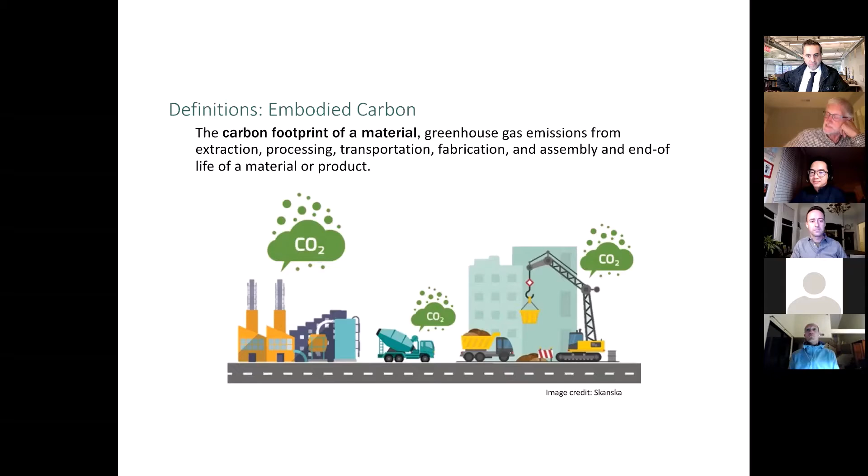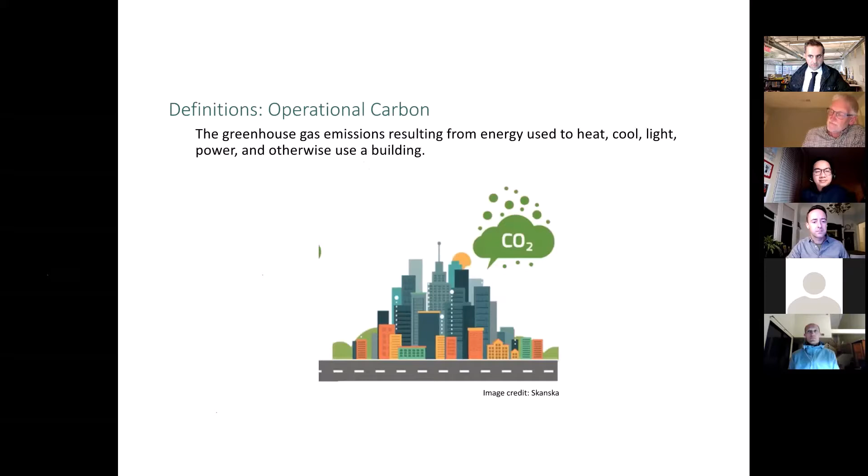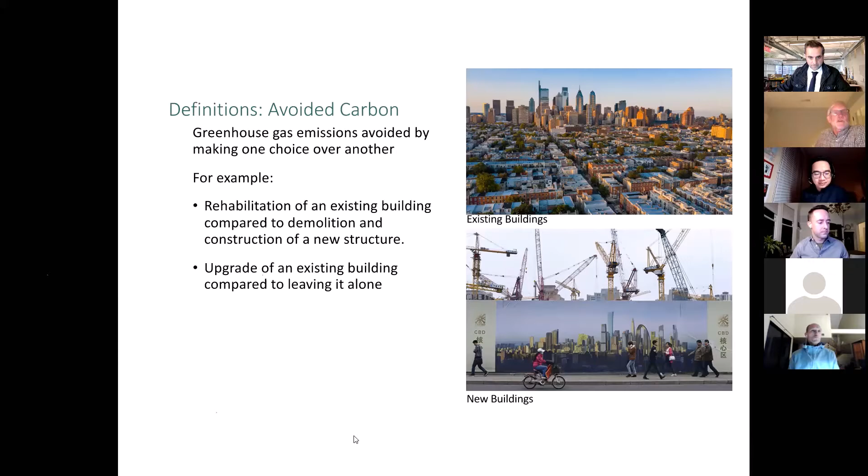Avoided carbon are greenhouse gas emissions avoided by making one choice over another. An example is rehabilitating an existing building compared to demolishing it and building a new structure, or upgrading an existing building compared to leaving it alone. So those are different versions of how one choice over another results in lower carbon, avoided carbon.

So I'm going to show you a renovation project. This is by SERA Architects, and it includes an embodied carbon analysis. It actually included a total carbon analysis, both embodied and operational carbon, which is why it's such an important study. These slides are from a presentation that SERA gave to the AIA Historic Resources Committee, and they were kind enough to share their presentation with me.

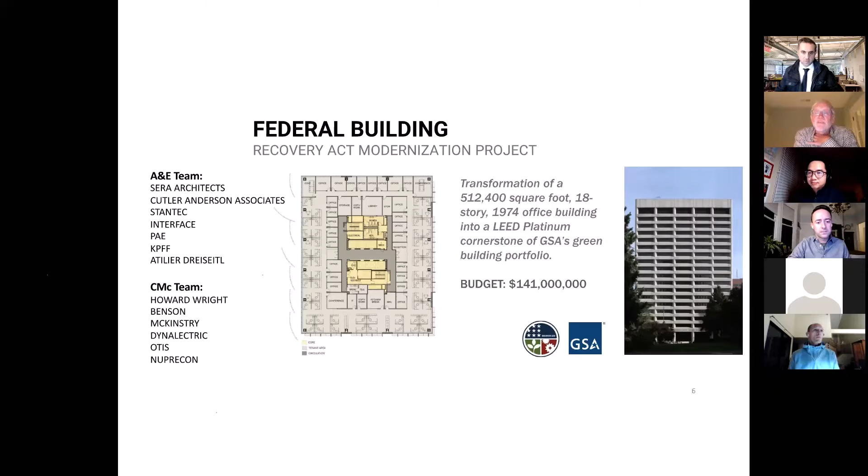It's a large federal office building, about 500,000 square feet in Portland, Oregon. Had a large integrated design team as well. SERA were the architects of record, and they worked with Cutler Anderson Associates, the design architect, and had an excellent engineering team and a construction management team as well. They had about a $141 million budget to renovate this large office building.

It needed a lot of work. They needed to upgrade all building systems. They needed a seismic upgrade on the existing buildings, which is typically a big embodied carbon hit. They needed to update the work environment and get better lighting, improve indoor air quality, and they needed to improve accessibility throughout the building. So they had a lot of things to do to this building.

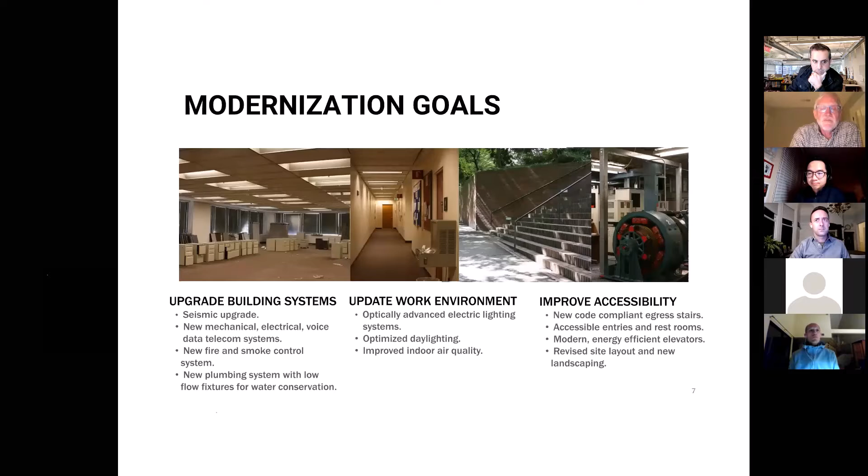The existing building on the left there was constructed in 1974. The demolition included removing all those precast concrete panels from the outside of the building, and then constructing a new skin or a shade structure. You'll see how this works on different sides of the building. And they got a lot out of doing that. I'll show you in a second what they got from that.

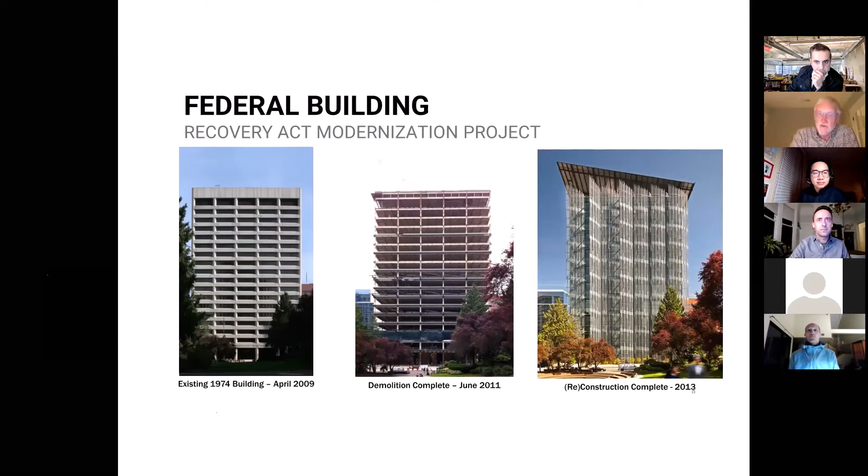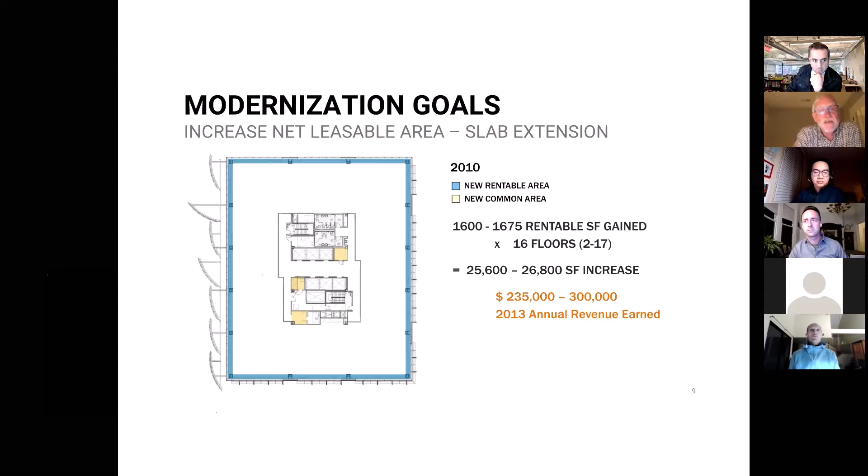So they were also able, by getting rid of those precast panels and building the new skin outside that, to actually increase the rentable, leasable area of the building. They got an extra 26,800 square feet of building on all the floors. And that was about $235,000 to $300,000 of annual revenue earned, because it's on a square foot basis. So they got some benefit by removing that skin.

The other thing that was really interesting is that by removing all those precast concrete panels, they lightened the building enough so that they didn't need the structural upgrade. So they avoided a huge piece of embodied carbon that they would have needed to strengthen this cast concrete structure. By removing all that extra weight, based on current seismic codes, they lightened the building enough where they did very minimal seismic upgrades. And they built this new skin, which served multiple purposes, but it was also much lighter than those precast panels.

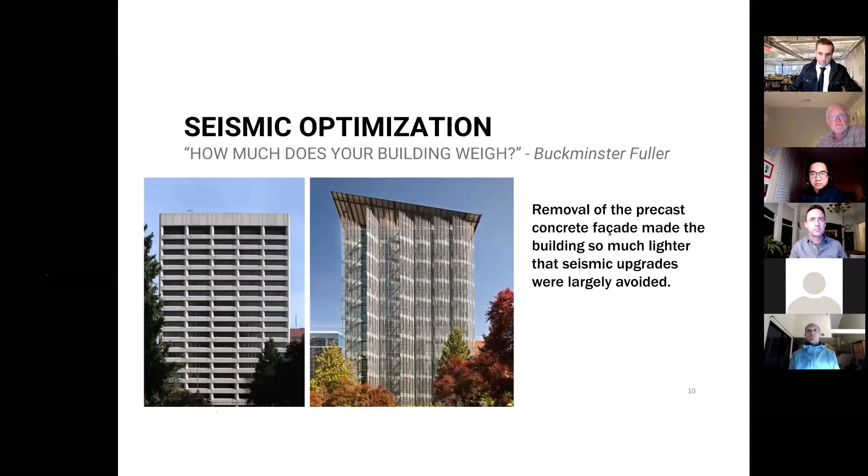The facade was optimized for each orientation and for what they needed it to do. On the west side, where the big heat gain comes from, they had undulating aluminum reeds that covered the facade and reduced heat gain by about 50%. The north side, they did no shading - just a simple wall with glazing. The east and south sides, they did horizontal and vertical shades, but much simpler than the west side. They did this both to figure out what they needed on each side and to keep the cost down. If they'd done that undulating facade across all four sides, it would have cost a lot more. So they were very smart about the way they upgraded the building.

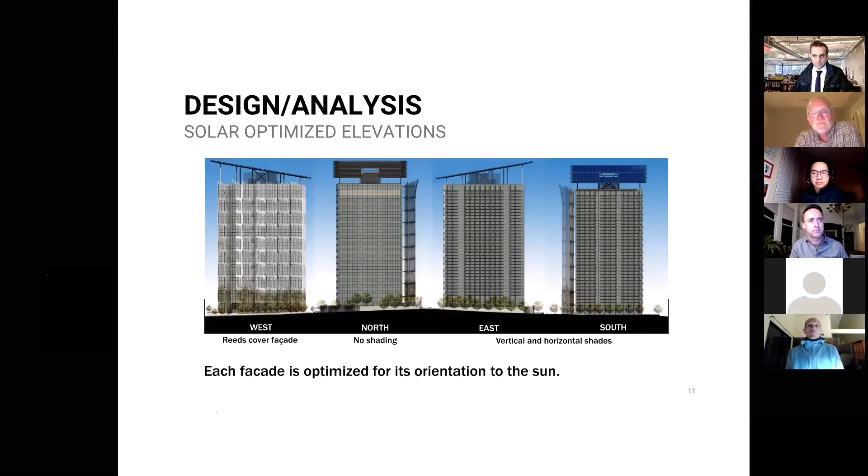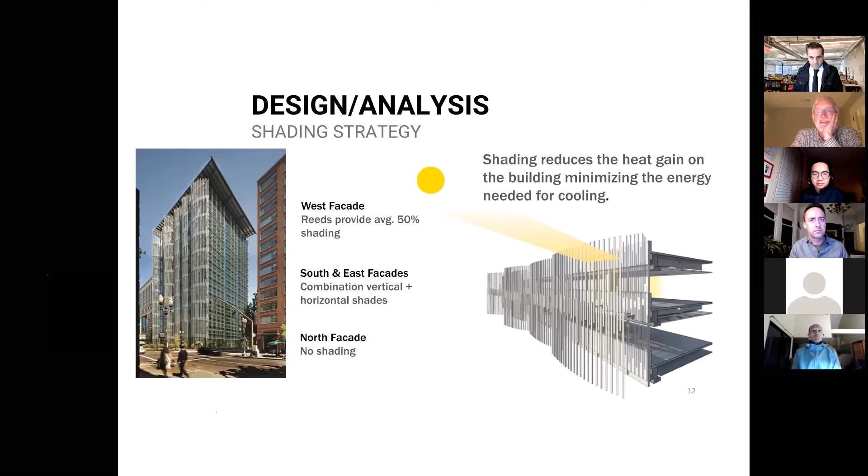So they did this shading strategy. As I said, they reduced about 50% of the shading on that west facade. The south and east facades were simpler, you can see them on that picture on the left. And they reduced the heat gain in the building, which minimized the energy needed for cooling. They got extra benefit from that.

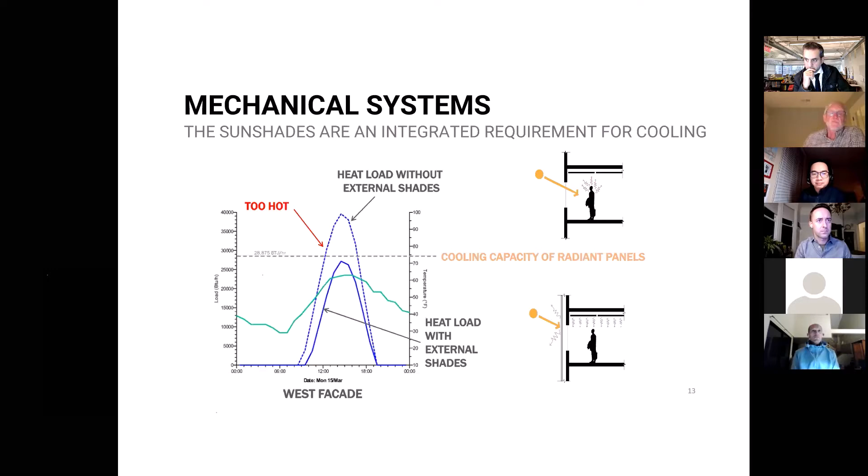What it allowed them to do was reduce the heat load enough so they could go to radiant cooling panels on the ceilings. You can see that without the external shades, the heat is so hot it wouldn't have worked - the cooling capacity of the radiant panels would have been exceeded. When they reduced the heat load with the external shades to that solid blue line, they were able to use this much more efficient system and save energy on that as well.

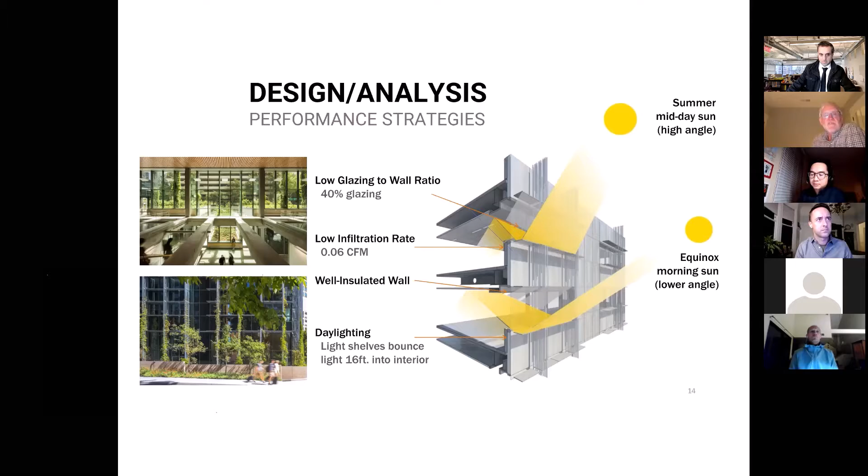What they got from this: the existing building had an EUI between 77 and 83. I don't know why there's a range there, but I guess that's the way they measured it. The average for that kind of building is 94 EUI, and their target was 34 to 36 EUI - they were going to basically cut their EUI in half. You can see this compared to some other high performance buildings built in the last 10, 15 years, and it's right in there with all of those.

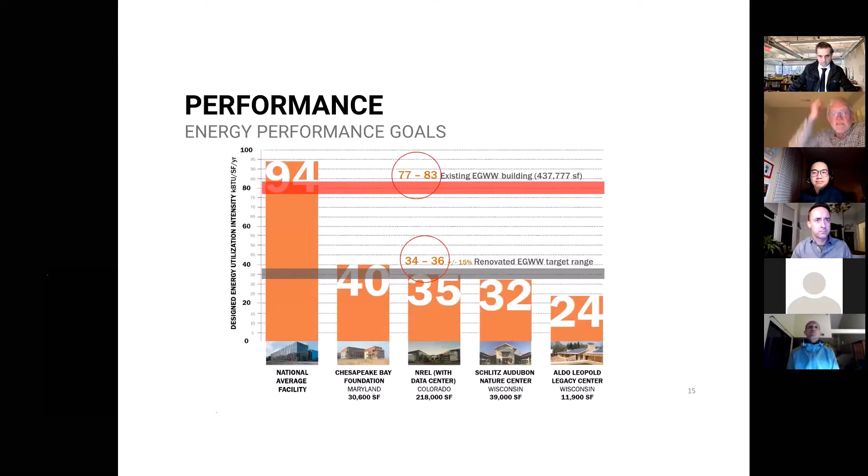When they actually did the building, they got an EUI even lower. The actual measured EUI of the building is 31.5 kBTUs per square foot per year, so they exceeded their goals. They got about 61% savings in energy use just from the mechanical and envelope upgrades.

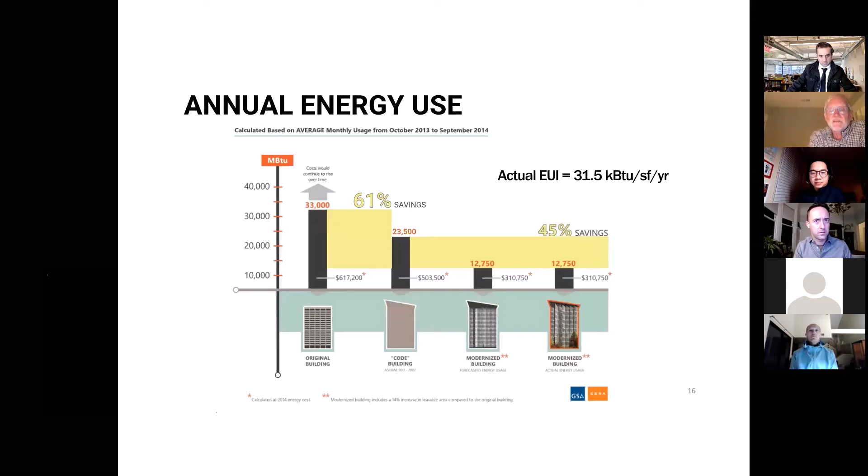They also did a detailed embodied carbon analysis, and then they put this all together. They used Tally to model the building - most of you are probably familiar with Tally, but it basically uses the material quantities modeled in your Revit model to calculate the environmental impact of those materials.

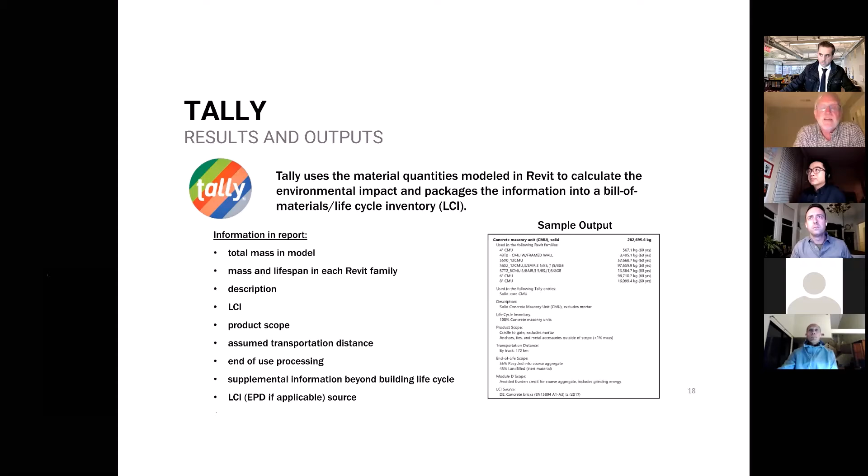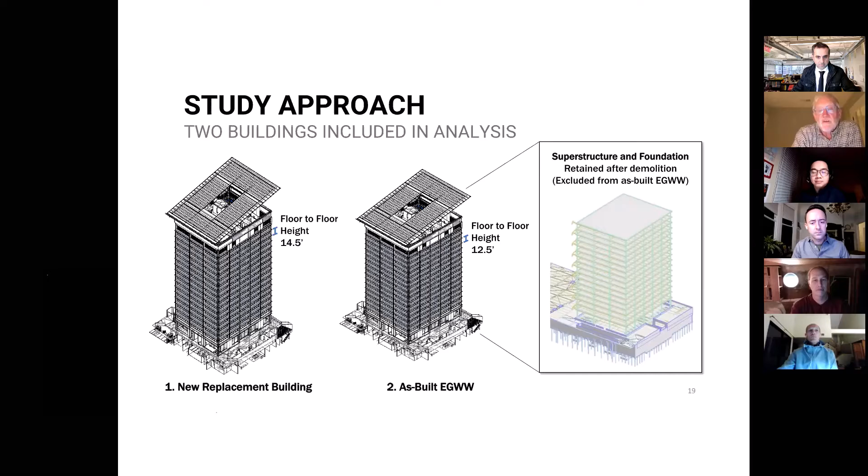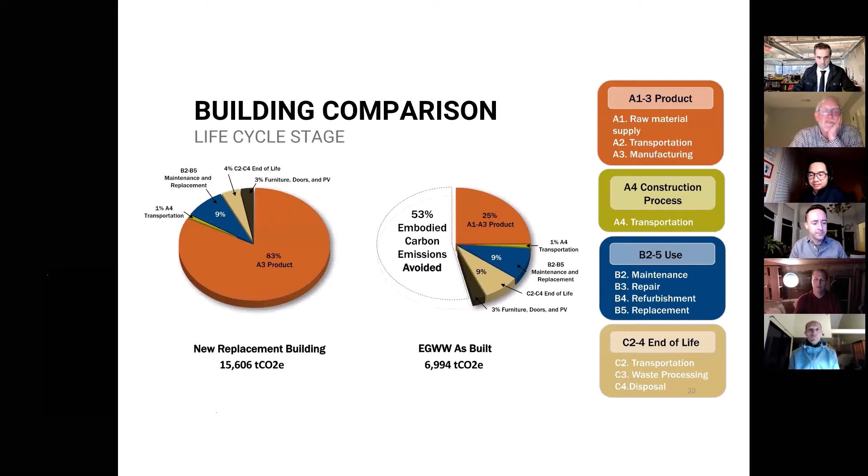The new replacement building would have generated about 15,000 tons of CO2 to build, and the as-built building was a little under 7,000 tons - less than half. You can see most of that savings was in the product. The transportation, maintenance, ongoing, end of life aren't that different, but the product was different because they reused most of the structure and the foundation. That's where all the savings was, in all that reuse - 53% of embodied carbon was avoided.

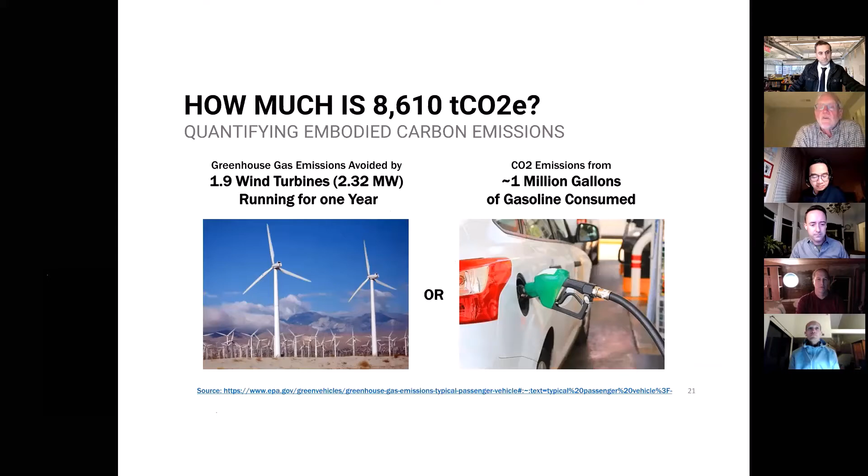That 8,000 tons of savings is about almost 2 large-scale wind turbines running for a full year, or about 1 million gallons of gasoline in embodied carbon savings.

Now, the first thing, when I saw this building win an AIA COTE Award, I said, well that's great, but how much did they spend on that aluminum curtain wall? The embodied carbon must have been staggering. And they had the same thought - so they went back and actually modeled the savings that the curtain wall generated versus the embodied carbon it took to build it.

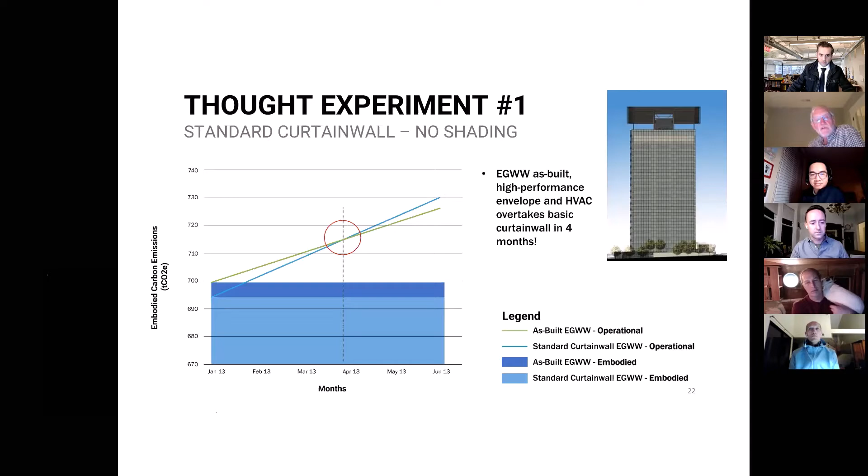The light blue bar across the bottom is the standard curtain wall embodied carbon. The as-built embodied carbon of that curtain wall raised it by about 10 tons of emissions. The savings overtook the actual added embodied carbon in four months. So they saved that amount of embodied carbon in four months of better performance from the curtain wall. That was pretty impressive, I thought.

So it really makes sense: if we're going to get to carbon neutrality, we're going to have to do it with existing buildings, because we just can't afford to keep building new buildings. Even if they're close to net zero, it still takes a while to recover the amount of carbon it takes to build a new building.

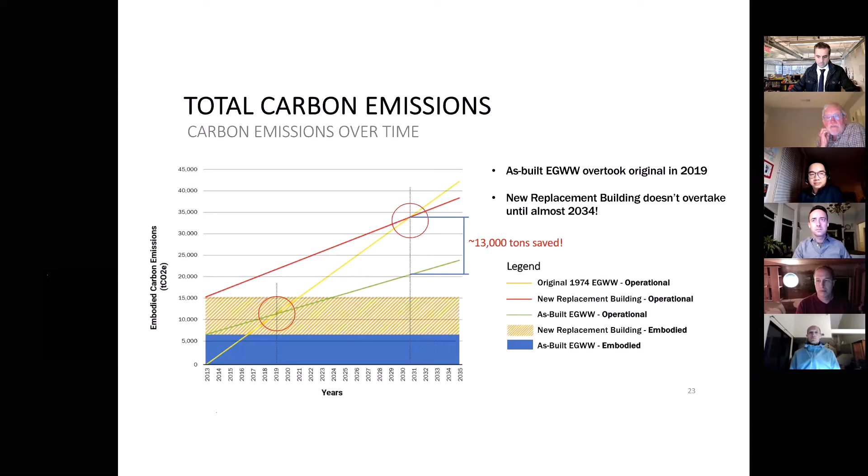This is just an illustration of a well thought out project that both saved embodied carbon by avoiding building a new building, and saved a lot of operating carbon by really increasing the performance of the building. I think that may be my last slide—okay, I've got a couple more.

So how do we do this? You put together a really committed integrated design team. They had a very good team that worked together and back and forth between embodied and operational carbon. Set ambitious energy upgrade and emission reduction goals.

A lot of remodels and upgrades we do to buildings have targets like, let's improve energy performance by 20% or maybe 30%. We should have the same energy goals for an existing building retrofit that we do for a new building. At this point the goal should be net zero—we don't really have time for anything else.

You want to look for strategies that can save both operating and embodied carbon. The sunscreens were a great example in this project—they saved operating carbon by avoiding a lot of heat gain, and they saved embodied carbon because they avoided a seismic upgrade. So there was a double whammy. You need to look for those opportunities when doing a building like that.

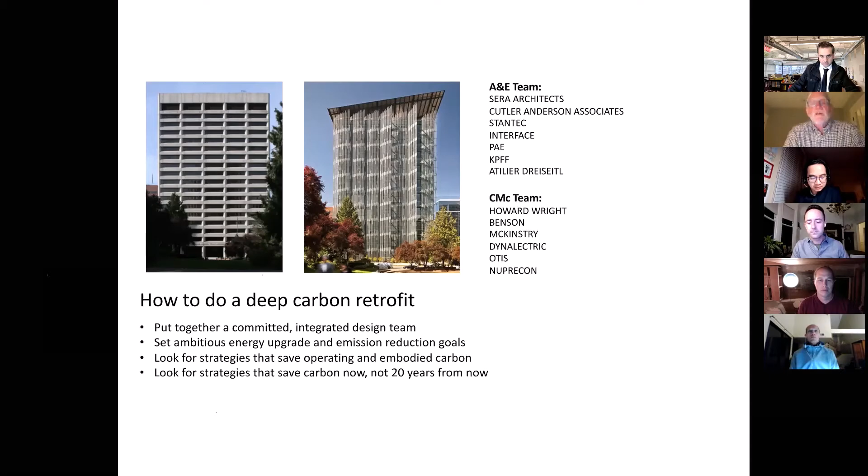Finally, we really want strategies that save carbon now, not 20 years from now. I think that's the end of my slide—we can't really save the above if we don't save the bottom. So, thanks.

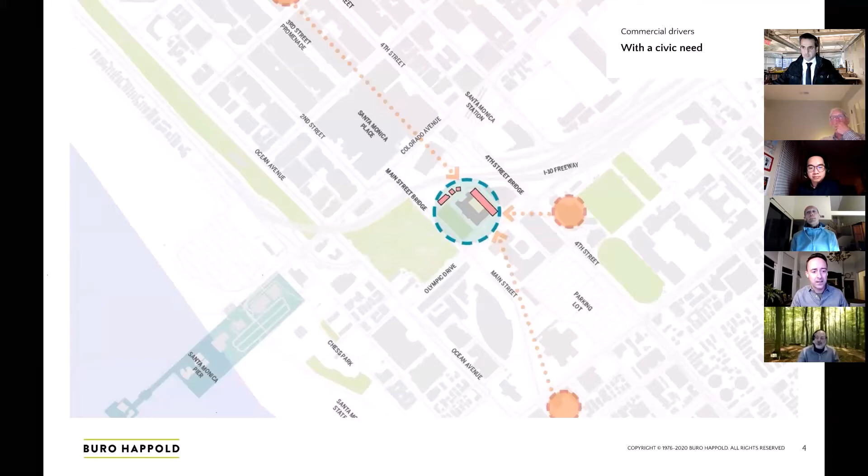So you can see here, connected to the south wing, the building fulfills this vision to bring all core municipal operations onto one campus and create a centralized hub for public counter services - where we as architects and engineers go for planning and to review mechanical plans, electrical plans, and so on. So the building will reduce municipal costs over time by consolidating all of their assets.

And it meets cutting edge criteria for what's called the Living Building Challenge, all supporting Santa Monica's commitment to sustainability with goals for carbon neutrality, water self-sufficiency, and zero waste in the coming decades. In addition to creating more energy and water than it uses, the City Hall campus hosts gardens in its courtyard and grounds for farming edible crops. You can see here on the site plan - they have all edible crops here, and that really supports the local biodiversity.

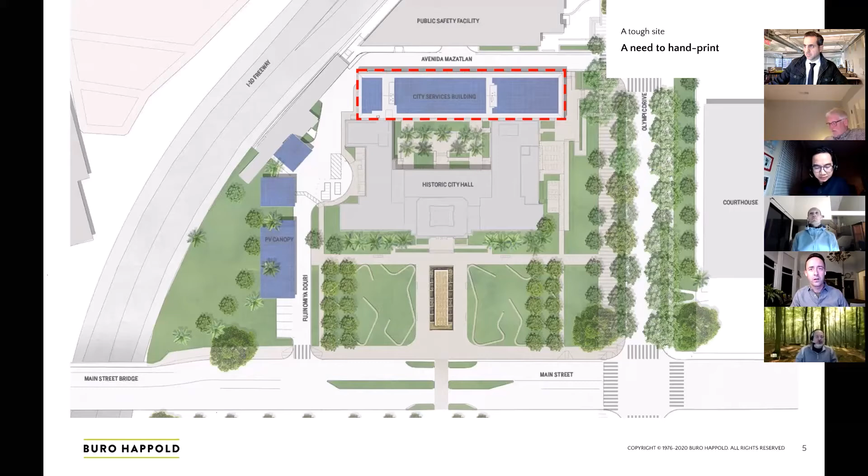They've selected plants to be native and adaptive, just to be eaten and picked and harvested locally and consumed kind of locally in Santa Monica. So with these and other features, the project will advance Santa Monica's sustainability standards and really set international records as the first municipal structure with a Living Building Challenge certification.

So honestly, I didn't know too much about the Living Building Challenge until recently, but to meet the Living Building Challenge criteria, the city services building must be healthy and beautiful, surpassing even the highest LEED certification requirements, and must offer regenerative spaces that connect occupants to light, air, food, nature, and community.

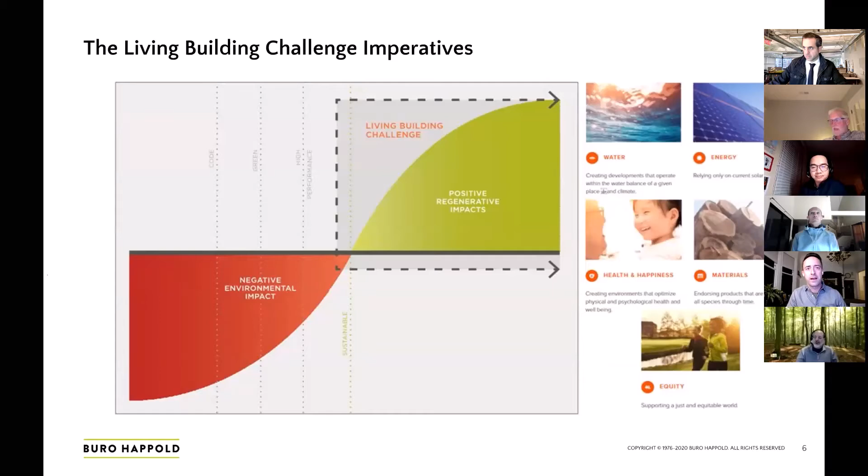The new structure must be self-sufficient and remain within the water resource limits on the site, produce more energy than it uses, and also collects and treats all the water on site, ultimately creating a positive impact on the human and natural systems that interact around it. So the standard really ensures that the city services building will make positive contributions to the environment as opposed to merely lessening the negative impact.

So really what the city was asking is, can they afford this? And I think what they came to is, can we afford not to do this? When you take a step back, this building is going to be owned and operated by the city of Santa Monica for its lifetime. It's going to provide a community asset. It's future focused. When we did the life cycle cost analysis, all of the measures that we've implemented will pay for itself within 15 years. It meets the city's climate action goals and really sets a new design standard and defines the procurement strategies for future buildings in the city of Santa Monica's portfolio.

For the purposes of this discussion, the Living Building Challenge had a panel of 7 major items - kind of the ethos. We're going to touch on a few of them today, starting with the most important: net zero water.

There were 3 separate water strategies that collectively allow the building's needs to be met, and we're harvesting water on site. For potable water uses, rainwater is captured on the roof. It's also captured from all the PV panels, and it's brought to a 40,000 gallon cistern located beneath the building. In drought conditions, it's supplemented by groundwater pumped from a well on site.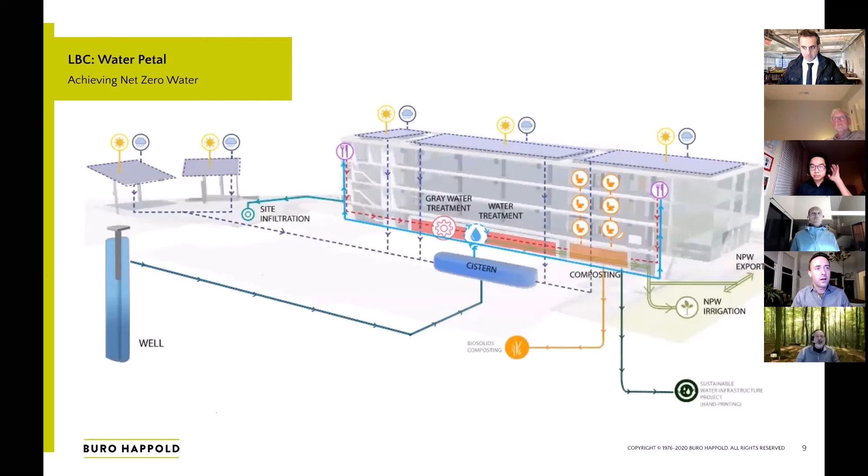The last bit of the water use is all of the projected sewer demand from the building, which was cut by half with the introduction of a composting system for all the labs.

So just to break this chart down, on the left-hand side was the baseline case, and the brown bar at the bottom was all the laboratory use. On the chart on the right, off the bat we're eliminating all the black water from the site by using composting toilets. In addition, by collecting all the rainwater in a cistern, we're able to offset the rainwater that falls in the winter months, and then offset that over the entire course of the year to basically achieve net zero water.

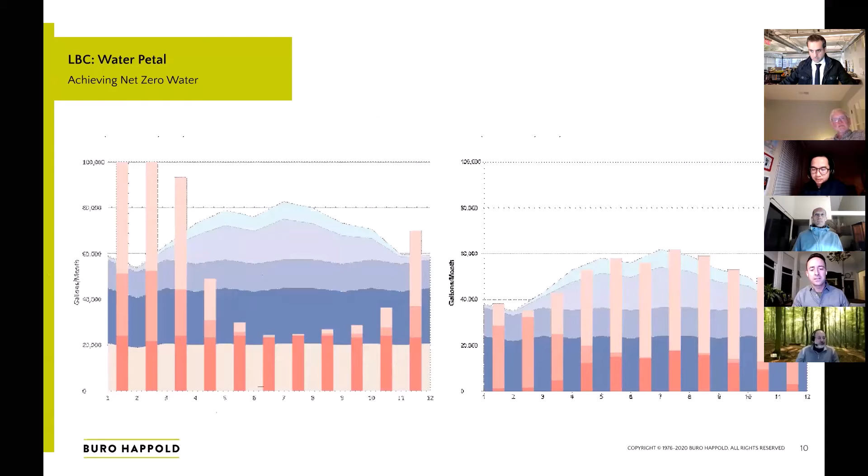Next slide. This is just another quick overview of the water system as a whole. Water is collected from the roof, fed into a system where it's treated on site, serving all of our lavatories, showers, what have you. And then all the gray water is again treated on site where it's then used for irrigation.

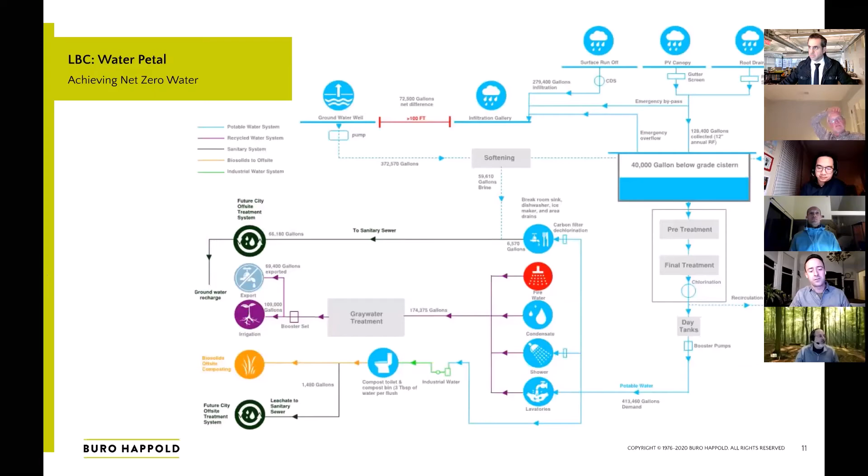Next slide. This is just a picture of the composting system located in the basement of the structure. It requires some maintenance. It was approved by LADPH as a pilot program, kind of the first of its kind in this area. So all of this space planning was part of the design and one of the considerations we had to account for as part of the project.

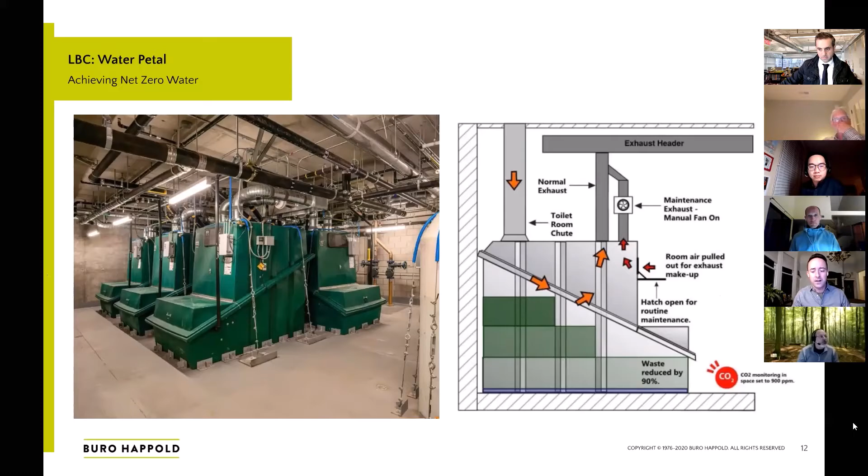Next slide. Again, this is the gray water treatment that is done on site. So again, a lot of mechanical services were required as part of this project that may not typically be considered as part of a standard building. Next slide.

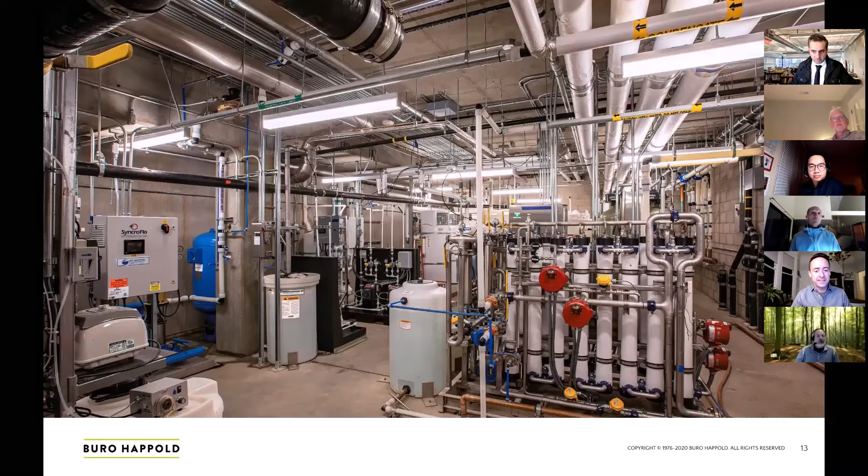The next major component from the Living Building Challenge petal that I really wanted to touch on is materials, health, and well-being. Next slide.

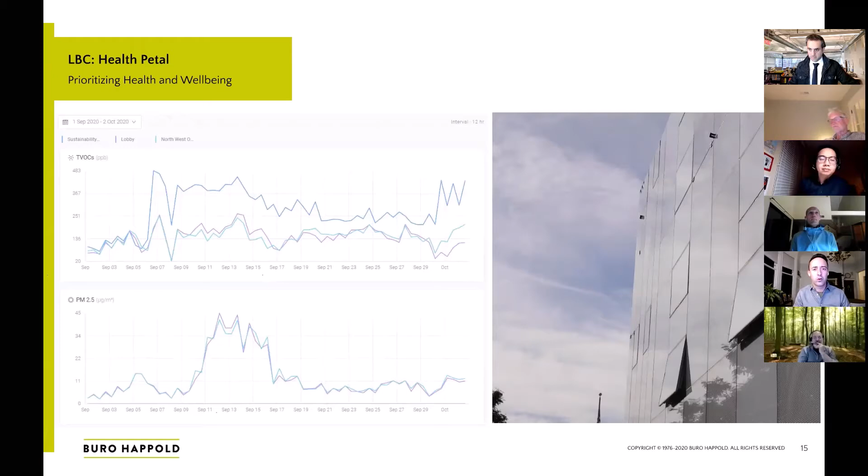The project was designed to provide healthy air to the occupants by focusing on limiting source pollution and providing best practices ventilation rates that will be enforced via operational strategies. So we're implementing environmental sensors, as well as continuing what LEED already builds upon, which is no smoking policies and extensive entryway system cleaning, which are things we've grown to do on most projects already.

Next slide. Some of the adaptive feedback we've provided to the occupants is we're actually monitoring contaminants, and all of this provides feedback to the occupants, but it's also integrated into the building management system and can operate windows and change the ventilation system in the building. Next slide.

In terms of materials on the project, there has really been a wave of activism over the years on the larger social impact of green building materials and new research into the life cycle performance of those materials. It's really no longer enough for a building to be net zero, solar powered, or utilize non-potable water. We're really diving into the raw materials and products used to construct green buildings, and those materials have to be sustainable from both an environmental and a social perspective.

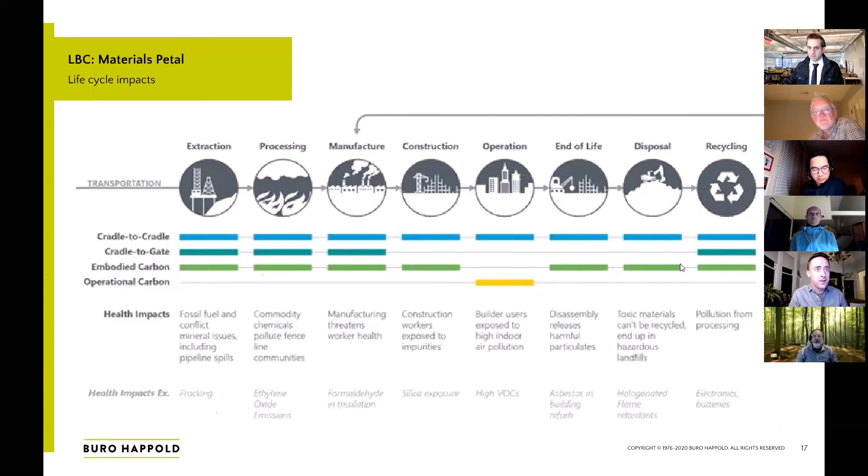The design team began vetting materials really early on in the schematic design and budgeting phases, and we were able to develop a work plan with the team to divide it up and vet materials across the board to start developing the performance specs on the project. The project was ultimately a design build delivery, so after 50% DD we handed off the project to design build contractors, and having this plan in place up front really allowed the subcontractors to take this and do the research on appropriate manufacturers in the bid process. But it was really, really important for us as a design team, architects, engineers, the owner, to be focused on the specification really early in the project, which, as we all know, the specs sometimes take a backseat until later in the process.

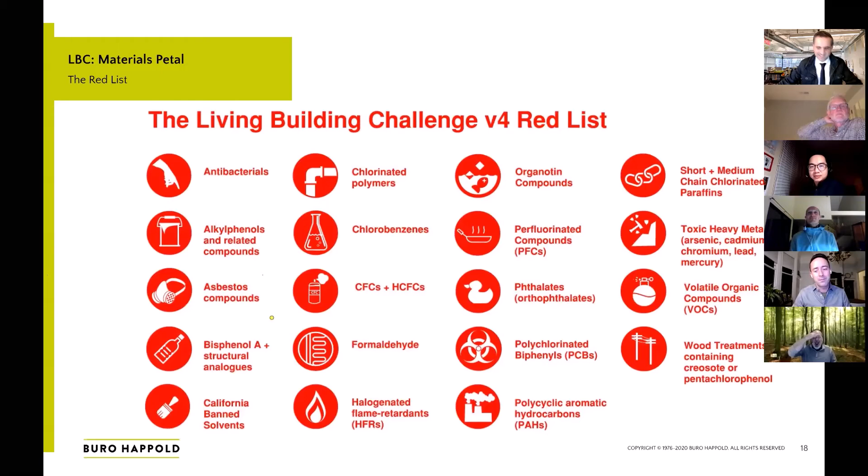Next slide. And really just to put the red list in context, eliminating carcinogens, asthmagens, et cetera, from building materials can significantly improve the air we breathe. Next slide.

Breaking this down into something I deal with all the time as a mechanical engineer, just ductwork. We don't even realize all the things in a typical duct system that are specified that we might not typically analyze. But in the Living Building Challenge, we had to analyze every bit of an assembly, including sealers, mastic, foil, protective coatings, duct closures, adhesives, and so on. It goes to show that every system, whether it's a lighting fixture and all the little bits and pieces in it, it felt like a daunting task as we started down this road, cataloging every material to make sure it conforms to Living Building Challenge guidelines.

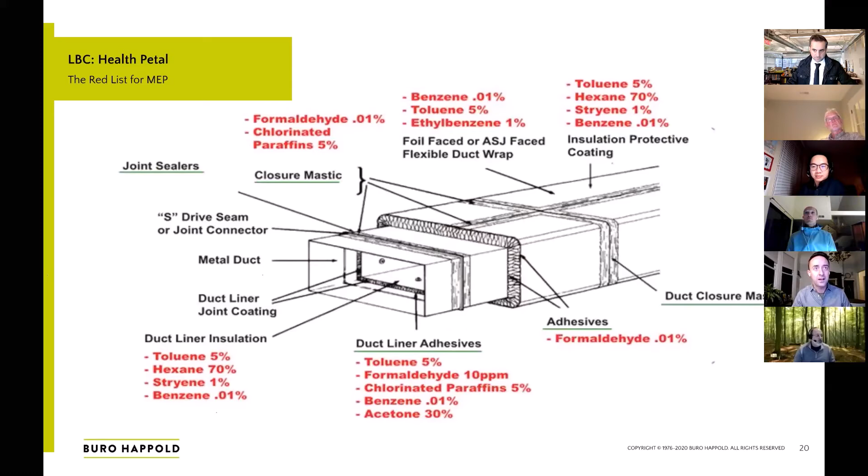The last component from the Living Building Challenge I want to touch on today is the passive design HVAC strategy.

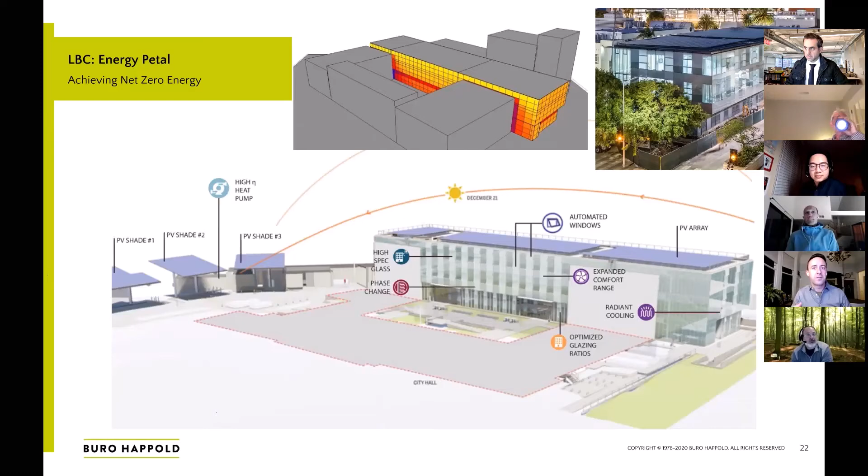We implemented a number of passive design techniques to maximize daylight, views, and natural ventilation to ensure occupant comfort while minimizing energy use. The building is also hardened against natural disasters and will serve as an essential public safety service center in the event of an emergency, as you'll see in a bit. Based on the energy modeling done during the design phase, it was clear there wasn't enough roof area to accommodate solar to cover all the electrical loads alone, so we were able to implement, luckily, multiple other PV solar arrays on site needed for net zero energy performance.

The architectural form of the building really helped us with the daylighting strategies. The building itself is very long and narrow, only about 50 feet wide, and that helped us push all of the workspace to the perimeter. Similarly with natural ventilation, it allowed us to use the geometry of the building to cut down our energy use, whether for electric lighting or ventilation.

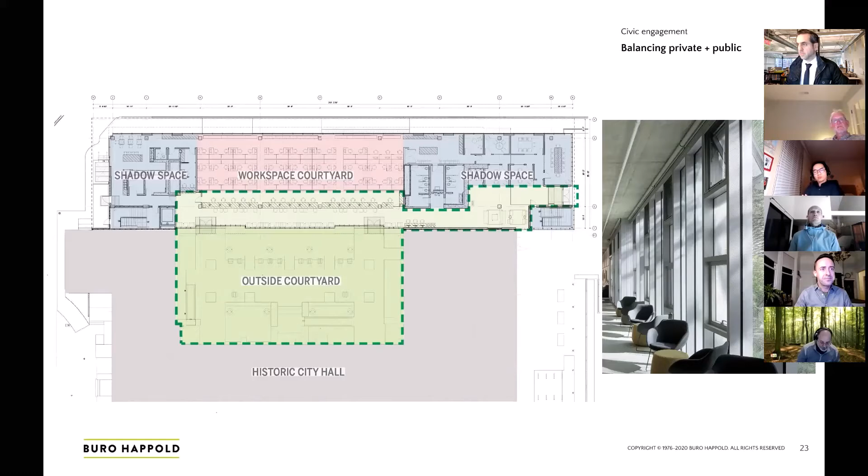I'll spend a minute on this slide because it really tells the story of all the systems. Large operable windows are located at two levels on each floor: one at occupant level, meant to be manual windows someone can walk up to and open, and a second level up high that's automated and controlled by the building management system based on outdoor conditions. So nothing needs to be done manually. If the building isn't heavily occupied, like in COVID times, you don't need someone to go open windows to implement these strategies. The building lives on its own and automatically opens windows when it's optimal.

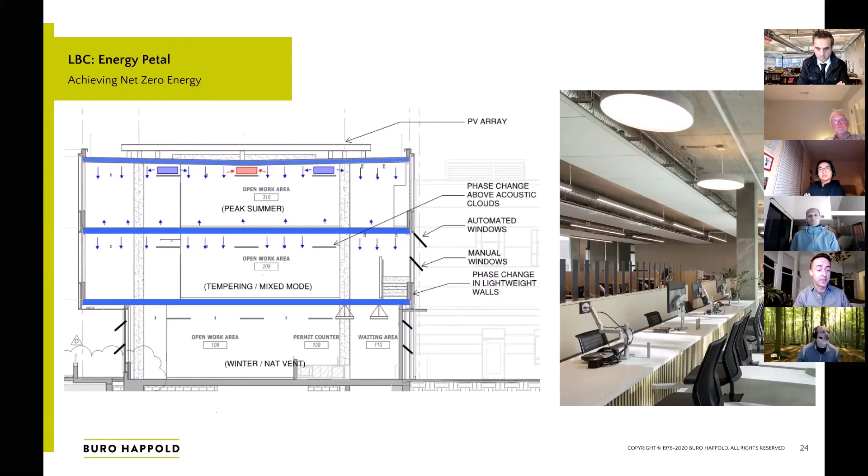We've also implemented phase change material on the walls and ceilings, which allows the building to retain heat in the winter, or retain cool energy in the summertime. It really just added thermal mass to the building, allowing us to utilize the nighttime conditions of Santa Monica, getting the air right off the ocean. We're able to cool down the building at night and then retain those cool temperatures during the day, with minimal mechanical HVAC systems. We do have a backup VAV system purely for backup, but it's not meant to be the primary source of heating or cooling.

Those are some of the passive design strategies. In addition to all the mechanical strategies, one goal was reducing the electrical load, partly by reducing lighting power densities, and partly through the equipment issued to everyone working here. Instead of desktop computers, everyone was issued laptops, cutting down on the number of printers and monitors. So looking at the plug loads in the building was also really important in analyzing the overall electrical use of the building.

Going out of the norm with cooling strategies. Because we're using natural ventilation, we were able to adjust the expectation of the mechanical system. A typical office building may be cooled to 74, 75 degrees, but we're actually going to raise the set point to 78 degrees. Based on placement of occupants against windows and how ventilation operates, we can prove that higher temperature is okay, and that reduces the amount of air that needs to be heated or cooled, which gives energy savings.

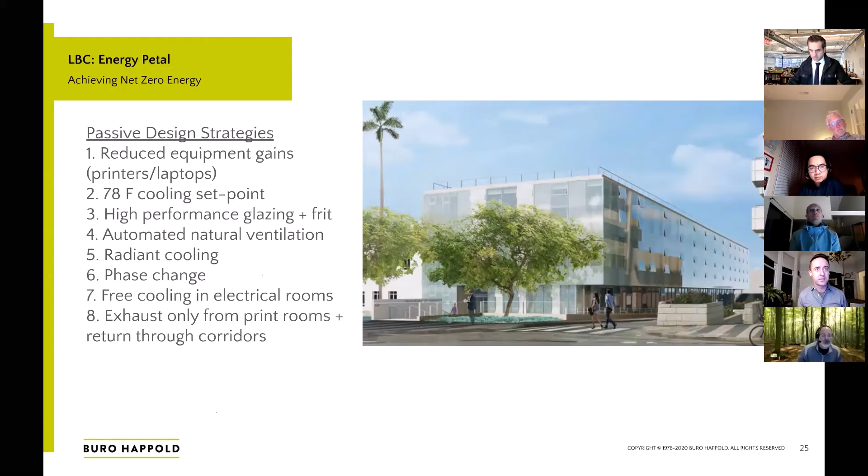In addition, we're implementing radiant cooling. We have hot water and chilled water running through all the slabs of the building, utilizing the structure to provide additional thermal mass, whether in heating or cooling mode, to heat and cool the building. It's a concrete slab structure, which does have some embodied carbon, but we're using that thermal mass to reduce the mechanical equipment capacities of the building.

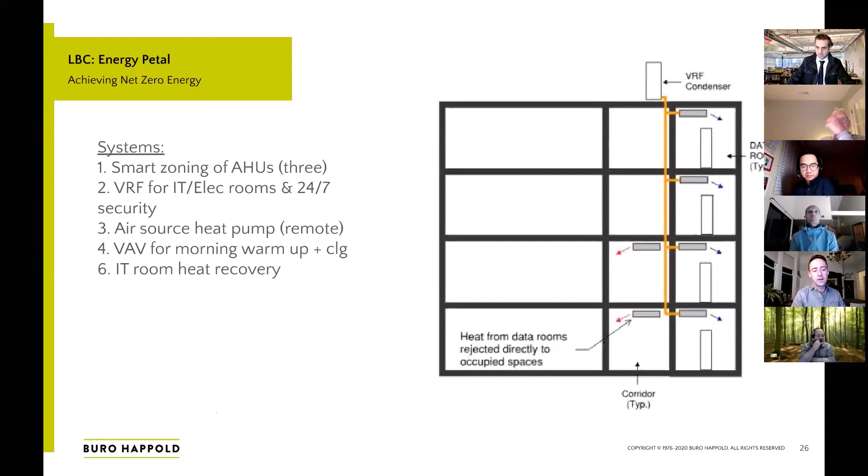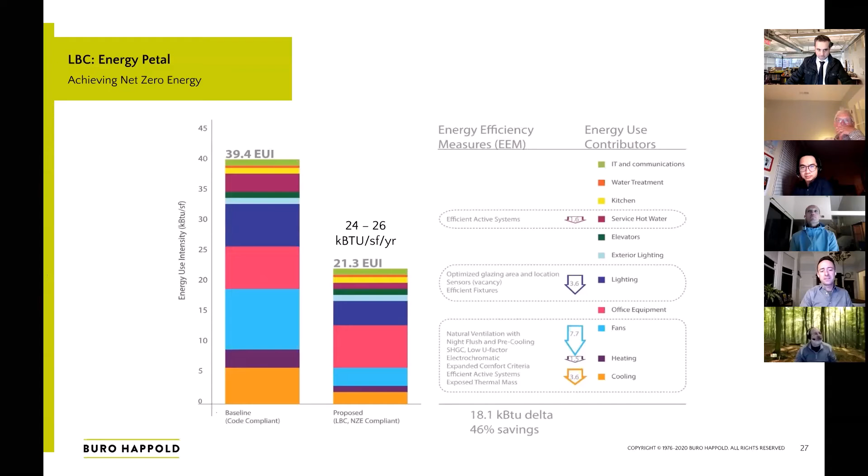In closing, the Living Building Challenge consists of an ambitious set of goals, which can require an unusual set of building strategies and systems, contributing to budget risk and schedule risk that many clients may be apprehensive about taking on. It really takes the right client at the right place to implement a building like this.

City of Santa Monica really was one of the best clients to approach with a building like this. They already had the ethos that they came to us wanting to implement a building like this, setting a foot forward for the future. They're going to hold on to this building for its lifetime, so it makes sense because they can pencil out a 15-year payback on all the energy conservation measures, since they're going to hold this building for 50 to 100 years.

I think that is it on mine.

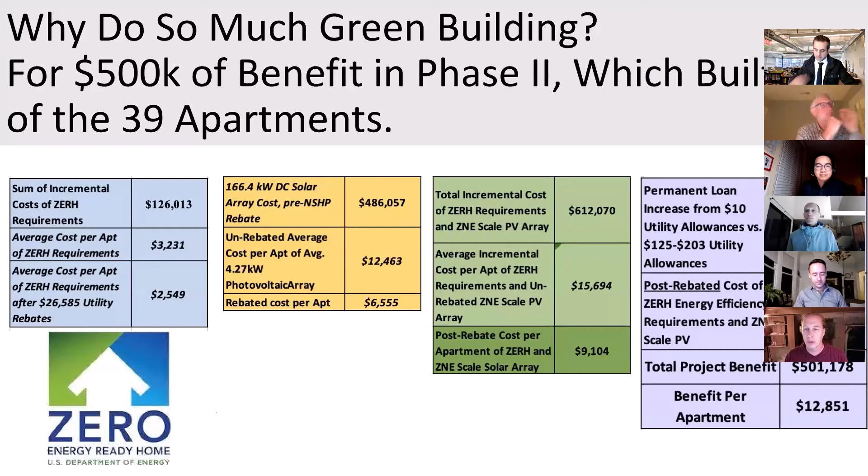Next slide. So who's there? It's a farm worker family community. It's a lovely place. Who owns the community? The community. Mutual Housing California is a nonprofit organization, and its bylaws specify that the majority of the members of the board be current, past, or future residents of the apartment complex.

Next slide. Who was the landscaping for? I was really touched by the edible landscaping you're just showing, and this is another one of those examples—peach trees, avocado trees. The landscaping is also rolled gravel, angular gravel about 4 inches of it, heavily rolled, so you can ride a bicycle or tricycle over the landscaping open area, but it still lets water in. We haven't had any issues with water draining into the storm drains—it just goes right through the gravel. It's permeable, but it's a playable space, and we roll it right up to the trees to protect them, putting a couple wood pieces around them. This is something Mutual Housing California has done in other developments. The picture on the right is from a nearby development in Sacramento, and those are jujubes, delicious, called mountain apples.

Back when people could still smoke cigars in movie theaters, and the whole place was filled with smoke, they would eat jujubes, the original fruit, because it's mucilaginous and would soothe your throat in the smoky theater. Now they became candies, but they're not actually jujubes, just sugar candy. That tray of jujubes, those are the real ones.

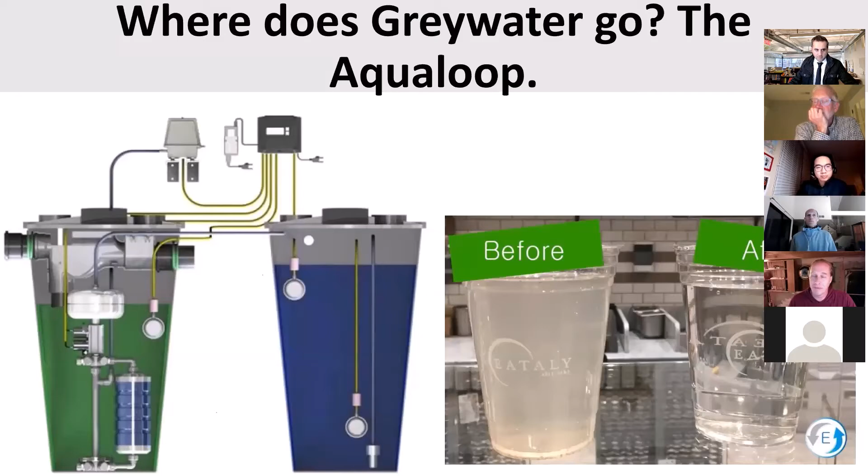So the kids grow up safe and free from poverty. These are farm workers making $12,000 to $18,000 a year as a household, with kids—1 to 6 was the most I ever saw, but mostly 2 or 3 kids per household, sometimes 4.

Here's a couple of quotes. From a parent: 'I was always scared when the bill would come when it was either really hot or really cold. In total, for the 5 months we've been living here, the bill has come out to under $30 total.' Another: 'The day we moved in, my 7-year-old son ran inside the house yelling, I love my house, I love my house.'

So here you see that's the woman presenting up there—she grew up in farm worker housing. She was the project manager; that's how Mutual Housing rolls. Vanessa used to have a can of rocks and she'd throw them at the rats, and her brother is a city council member of the City of Sacramento. Both of these siblings have really come up in society. Mutual Housing has her as the lead developer, project manager, and they're there showing people about integrated pest management and what's safe to eat. This is people being good to each other.

So the tenants and the owners both benefit from the energy efficiency. I want to mention the hood is Energy Star, which is nice because it means it's quiet. Most hoods are super loud. In apartments usually you have like a 3 to 7 sone hood. This is a 1 sone hood.

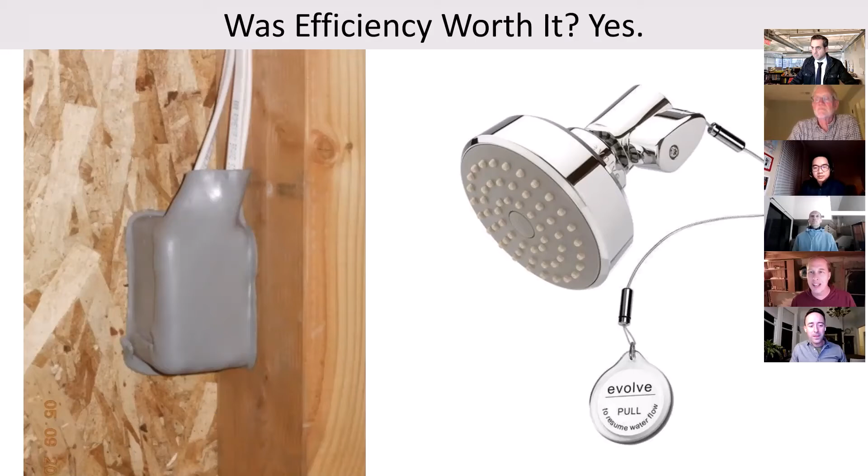Next slide. Which phase had better HVAC and domestic hot water?

Totally phase 2. Everyone likes to think that phase 1, which has a combined system - so it's 1 heat pump producing hot water for that tank, and it's got lots of valves in there, and it sends hot water to a fan coil for the furnace, like the ducted air - pardon me - and then a tank of hot water for the water use. This was expensive, it's no longer offered unfortunately. It's totally for sale over in Europe where everyone does hydronics. The United States has a limited number of people that could sell to. It's sensitive to problems, it's a huge system. It's 3 tons - water heating is only like a 4,000 BTU, 1/3 ton job, and they're using a 3-ton heat pump to heat the water.

Which is like in spring and fall in these super insulated buildings - there's no air conditioning or space heating going on for months. People are only turning on their air conditioning and space heating system between 1 in 3 and 1 in 6 days out of the whole year. Think about 1 in 6 days, that's how much they're using the heat pumps. So we have this 3-ton heat pump for a tiny little water heating need.

On the right-hand side, we have a right-sized water heater - it's a 50-gallon tank or an 80-gallon tank. Everything's really carefully plumbed to skinny little pipes, 3/8 pipes, so people get their water hot, fresh. And then there's the heat pump on the right there. Just want to point out, that is not a VRF - that is a ductless mini split with multiple heads coming off of it. Totally different, looks similar? Not. The important difference is that this is inexpensive and easy to install. A VRF, that takes refrigerant and it goes to a manifold box where it gets arrested and has to be repumped out of it, and there's leak potential all the way along. So you might have $22,000 in an apartment for a VRF HVAC system, and this is $12,000.

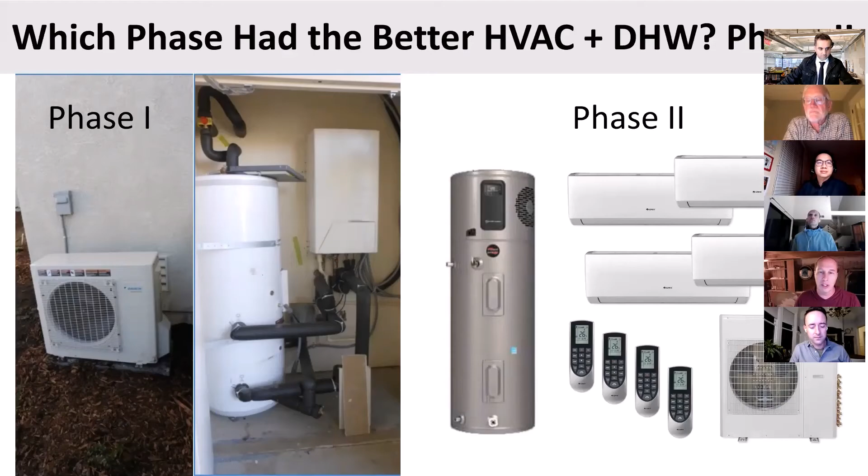A big difference - so this is a mini split with multiple fan coils coming off it. That's how I recommend people do all their work. You can run the pipes as long as 250 feet, and you can get them as big as 5-6 tons. So this way of dividing up the refrigerant and sending it off is one of the things we learned as we're doing bids and such. Next slide.

Okay, and this last slide shows that Spring Lake was 3% paid for by Green Building, out of its total budget—that was the net profit, about 3% of the budget. And that built 1.3 of the 39 apartments. It was to everyone's mutual benefit, really a sweet project to be involved with. So there you go.

Well, thank you. Wow, it's really great to see all this exciting project. And thank you, Larry, Justin, and Sean, for sharing the design strategy and some of the particular design challenges. So I know the audience would have a lot of questions for you guys, but before that, we have a couple questions for the panelists tonight.

Let's start with Larry. Earlier in the conversation, we talked about you being part of the Carbon Leadership Forum group, and you've been on the Carbon Benchmarking Committee for research projects. I know you've been working on a tool to compare carbon emissions for existing building reuse versus new building construction. Do you want to share some of the ideas there?

Yes, for about 2 years I've been developing a tool which is going to probably be out in the spring. It basically allows you to compare an existing building versus retrofitting and remodeling it some, versus building a new building. It gives you the total carbon outputs of each of those scenarios. So based on how big your retrofit is, how much you're remodeling, or what kind of new building you're putting up, it gives you a comparison of those three options.

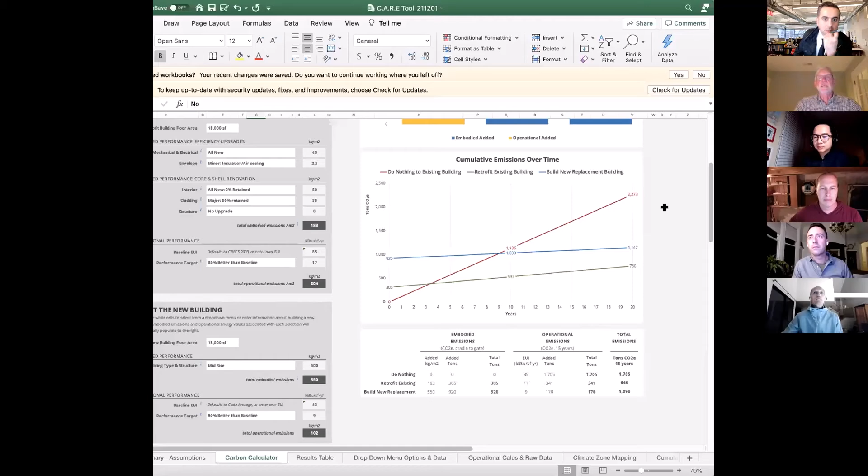So this is what the dashboard looks like. You basically enter basic building data about where it is and what size it is, and that gives you your climate zone and a bunch of other things about your building. Then you enter data about the upgrade—you can click over whether the mechanical system's new or partial, you can look at the envelope, whether you're doing minor or major upgrades, and look at all these different upgrade pieces, how much you're upgrading. It spits out an embodied carbon number for that, and then you set your performance target.

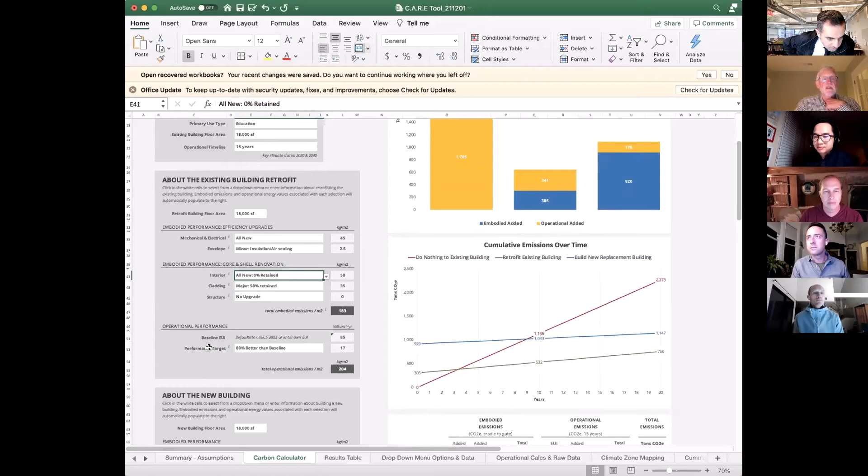So the default for the existing building is based on CBECS—85 kBTU for this building type—and the performance target for this building was 80% better. So it gives you that, and then you do the same thing for the new building.

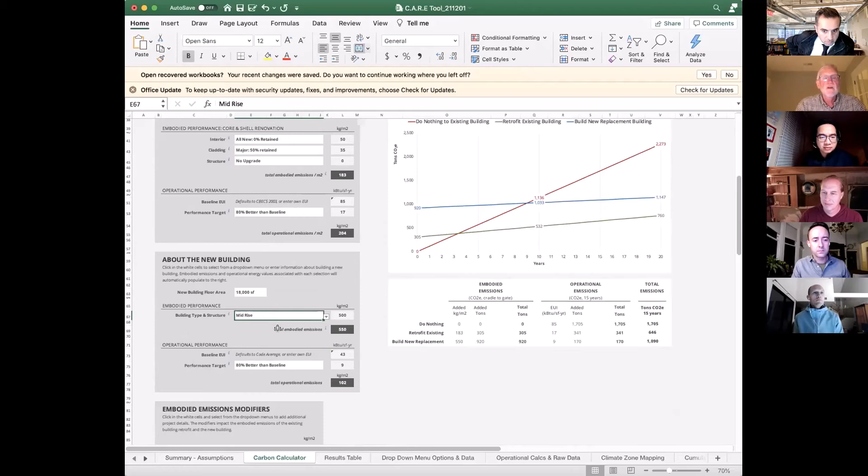You can look at 4 different building types. Each one has a different embodied carbon footprint. This mid-rise is basically a commercial steel and concrete frame building. And you can see that if you'd picked a light wood frame building, it drops to half that.

So it gives you different carbon footprints. You pick your performance target for the new building. You've got some embodied carbon modifiers at the bottom, and it plots it out. So there's the existing building on the left. That's all operational carbon because you're not doing any upgrades. The retrofit shows you your operational carbon in yellow and your embodied carbon in blue. And the new building shows your embodied carbon and your operational carbon.

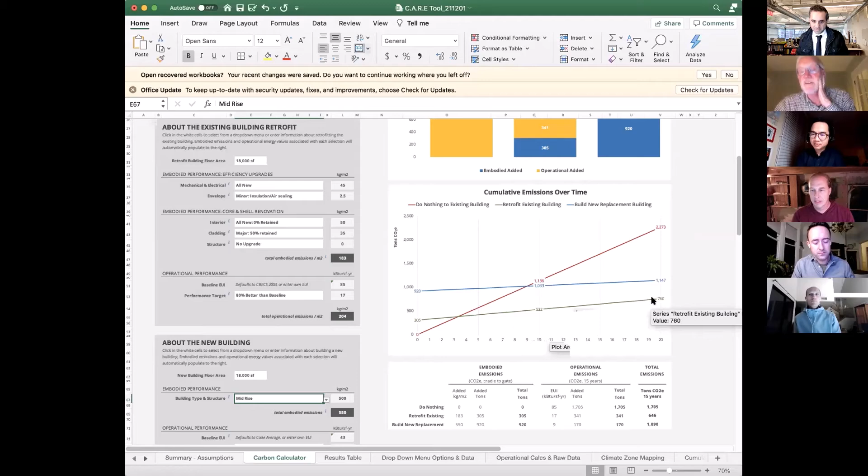So you can see it over time, the retrofit overtakes the existing building in about 3 years in this case. The new building would overtake it in about 9 years, but you're always going to be lower carbon with the existing building retrofit. It's always going to be lower than both other options in this particular example.

So that's how it works in a nutshell, and this is an Excel version. We're getting it built right now, so it'll be an open source web-based tool probably early next year.

Wow, that sounds great. Thank you, Larry. I mean, looking forward to using this tool for our projects. So another question, I know Stephen has another question, and we'll follow with that in a minute.

So another question is, I think Sean kind of touched on, is about the cost benefit to the communities, the residents, and cost is always a big issue when we talk to our clients about doing more for sustainability, and in this case, carbon neutral buildings. Larry, Justin, and Sean, I just want to see what your thoughts are, and how do you usually approach clients with this topic? What kind of tools or presentation do you use to convince them to do more, to commit to sustainability?

Yeah, I'll start really quick. It's funny, particularly in MEP systems and switching to all electric heating, for example, there's this perception that all electric buildings are significantly more expensive. I think in the beginning, and Europe has been doing this for a very long time, and in California, particularly in the last 2 years where it's become commonplace, it's really about education, educating our clients, educating each other as well. But now that we have a number of these projects that have gone through some stages of design and budgeting, what we're finding is there really isn't a huge delta to implement some net zero strategy.